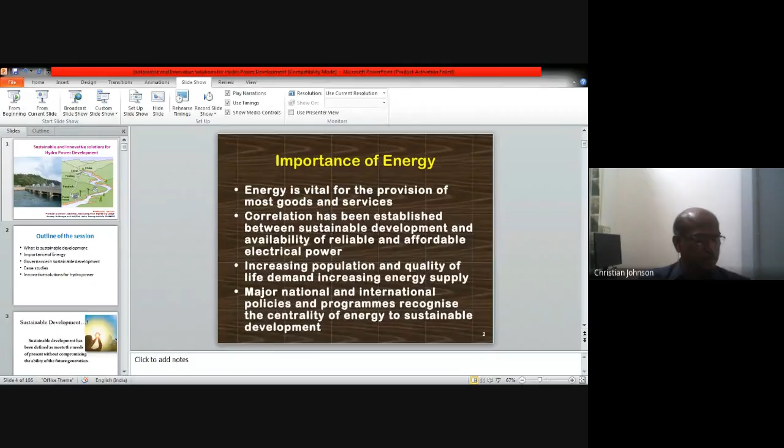Okay, this is the outline of the session. The points that I'm going to cover in this session are: what is sustainable development, importance of energy, governance in sustainable development, case studies, and innovative solutions for hydropower.

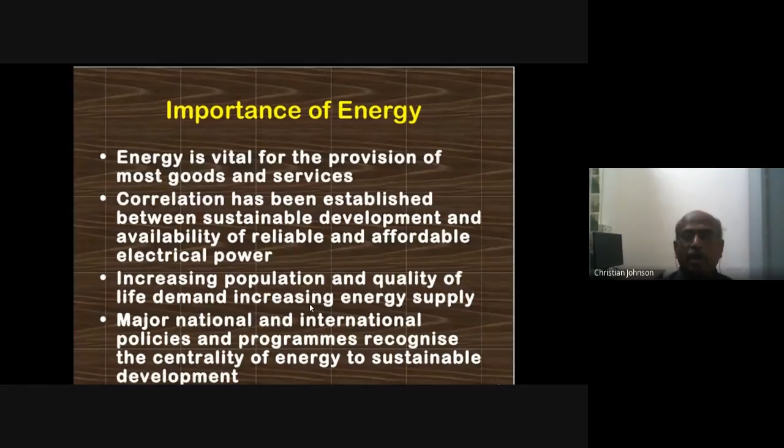Sustainable development means it meets the needs of the present without compromising the ability of future generations. You all know energy is very important. There is always a correlation established between sustainable development and availability of reliable and affordable electrical power. So increasing population in our country and quality of life demand always increases energy supply.

The conventional methods of energy supply have resulted in devastating environmental problems. You know that all the thermal power plants are emitting a lot of greenhouse gases leading to global warming, apart from environmental pollutions. So increasing demand for environment-friendly and renewable energy systems is the need of the day.

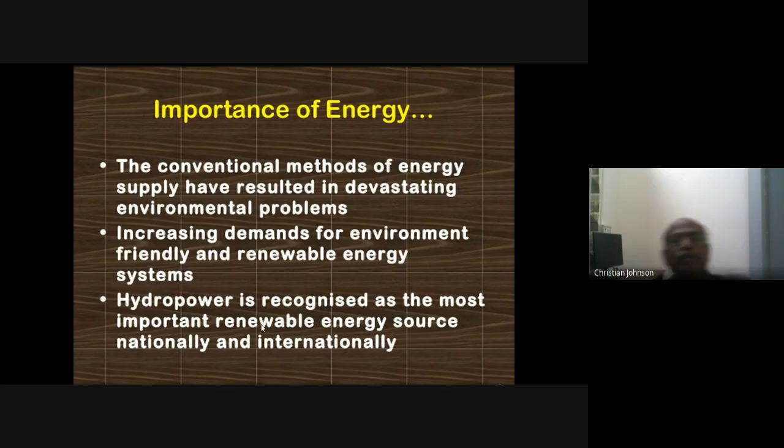So hydropower is recognized as the most important renewable energy source nationally and internationally. In order to keep this hydropower sustainable, proper governance, much prudence and discernment is needed.

As you all know, hydropower has been a leading source of renewable energy across the world, as I was telling in the last class, accounting for about 71% of the supply as of 2016. Most of the contribution is from North America and Europe between 1920 and 1970. During this 50-year period, thousands and thousands of dams have been built in those areas.

Even in our country, many dams have been constructed during those periods. The big dams stopped being built in developed nations because the best sites for dams were already developed, and environmental and social concerns made the cost unacceptable.

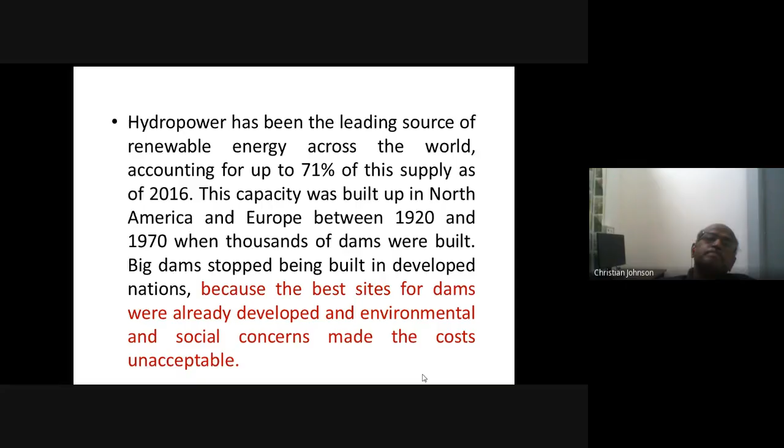So nowadays, more dams are being removed in North America and Europe than new dams are being built. The hydropower industry moved to building dams in the developing world since the 1970s, beginning to build large hydropower dams along the Mekong River basin in China, the Amazon River basin in Brazil, and the Congo River basin in Africa.

So in almost all these areas, the same problems have been repeated: disruption of river ecology, deforestation, affecting aquatic and terrestrial biodiversity, releasing substantial greenhouse gases. Thousands of people are displaced and people's livelihoods have been altered, in addition to affecting the food systems, water quality and agriculture near them.

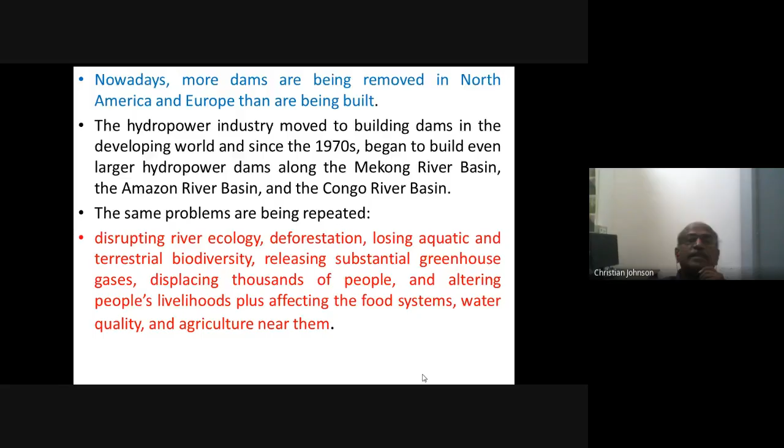So, under this scenario, we need innovative sustainable solutions to meet energy demands, guaranteeing food security and ensuring water availability around the globe.

So over the years, dams have been considered useful for land management and flood control. Considering these parameters, they also store water for irrigation and agriculture, provide recreation and navigation, and help address the management of aquatic resources.

Often large dams are promoted with the idea that locals will gain some benefits out of them. However, the evidence suggests otherwise. A recent study using a database of 220 dam-related conflicts found that in dams surrounded by controversies and conflict, the use of repression, criminalization, and violent targeting of activists and associations near the vicinity of the dams were common. So this is the result of a failure of the hydropower sector.

This demands good governance, keeping the sustainability issues in the hydropower sector in mind. Communities affected by dams frequently complain about the lack of consultation and attention to known negative impacts on society and environment, as well as the questionable promises made by the energy sector, stating that there is going to be cheaper energy bills, more jobs, and better infrastructure such as schools and hospitals.

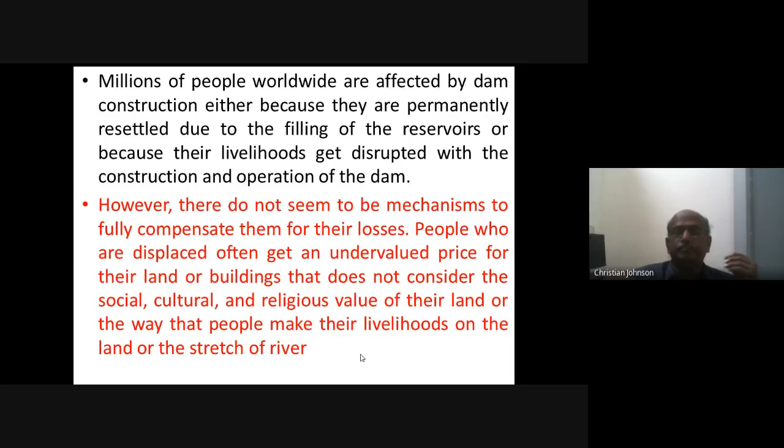In addition to that, it doesn't consider that after resettlement, people often lose their social networks and other types of social wealth, which has economic, cultural, social, and health consequences.

Communities that are not displaced, like those downstream, generally do not get any compensation, although the effects of the dam on their livelihoods are just as great as the effects on those with resettlement. This problem seems to be even more significant considering that most people affected by the dam are the poorest and more vulnerable in society, and they are often indigenous and traditional communities.

Monetary or non-monetary compensation mechanisms should consider that men and women are impacted differently by a dam, and ensure that the most vulnerable are compensated.

As one seeks to build a just and sustainable hydropower sector, it is important to build mechanisms that guarantee externalities will be internalized. In other words, those who benefit from hydropower far away need to compensate local populations where hydropower is produced, to offset the negative costs from energy production. They should also offset the heavy losses from transmitting power across great distances.

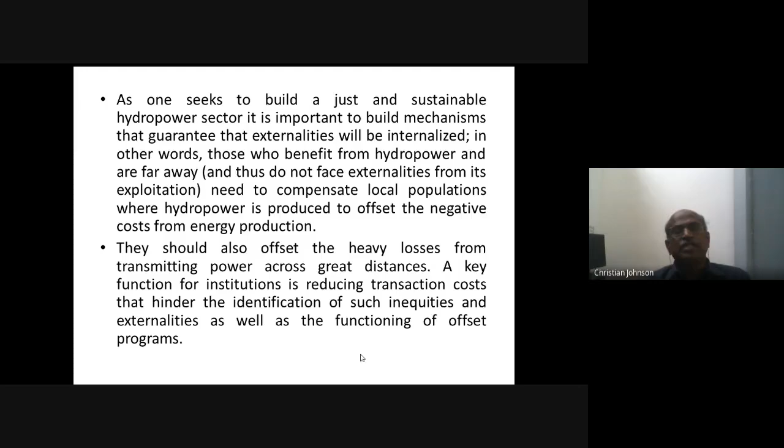A key function for institutions is reducing transaction costs that hinder the identification of such inequities and externalities, as well as the functioning of offset programs.

Sorry, somewhat these slides are having very deep points. However, I'm not going to go into more detail. But anyway, I will touch upon a few points. So when you go for the hydropower sector, there are so many socio-economic and political issues that need to be addressed.

Resettling people without concern for any of these issues will affect the public in a larger way. So whenever you go for hydropower, any nation has to keep these points - socio-economic and political issues - in mind. Only then can these sectors sustain.

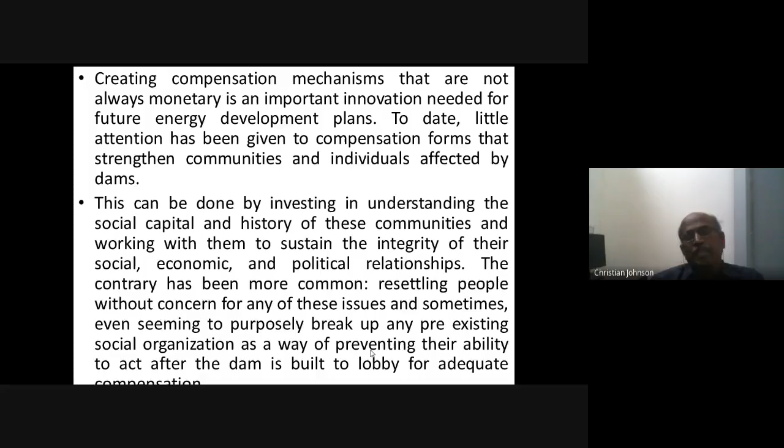As I was telling, some of the dams that got old in countries like America and Brazil are being demolished, instead of repairing and retaining them. I would touch upon some of the other case studies also.

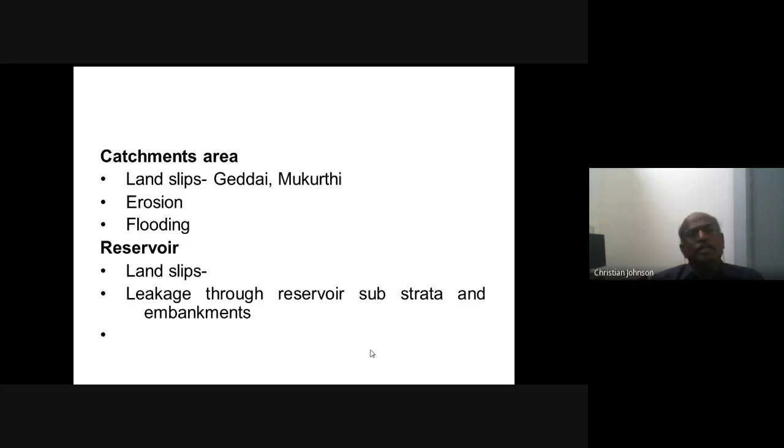From the local example in India - there are so many power houses in the Western Ghats connecting Tamil Nadu, Karnataka, and Kerala. In the southern part of the Western Ghats, there are so many hydropower stations existing. Almost all the power stations available in Tamil Nadu have been installed in those areas.

So in those areas, there are some issues like landslips, and landslips always result in accumulation of silt in the reservoirs. This causes a lot of erosion problems, and in addition to that, there are flooding issues also.

Whenever this landslip occurs, one has to be very cautious in order to avoid the flow of silt - large quantities of silt along with the canals or rivers into the reservoirs. Suppose if it is not done so, that will lead to a lot of silting and sedimentation in the reservoirs.

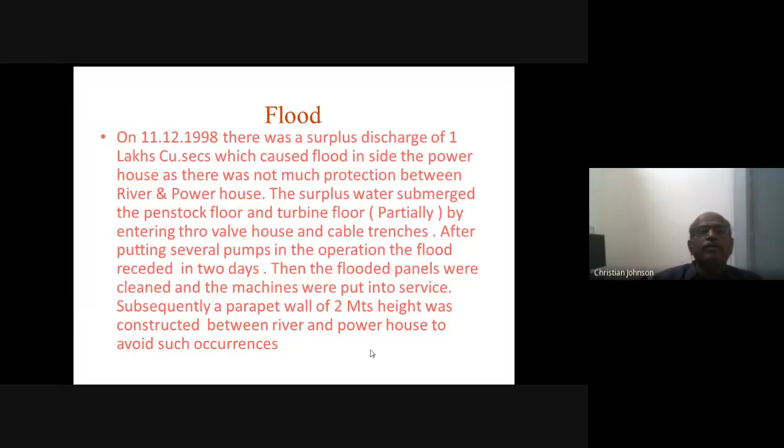So they have gone for putting some kind of parapet wall. These are all issues - when there is a flood, it inundates the nearby area. There was a nearby park affected by the flooding water, so people rose up and stood against this hydropower, even though it is cheap and reliable, because of these issues people object.

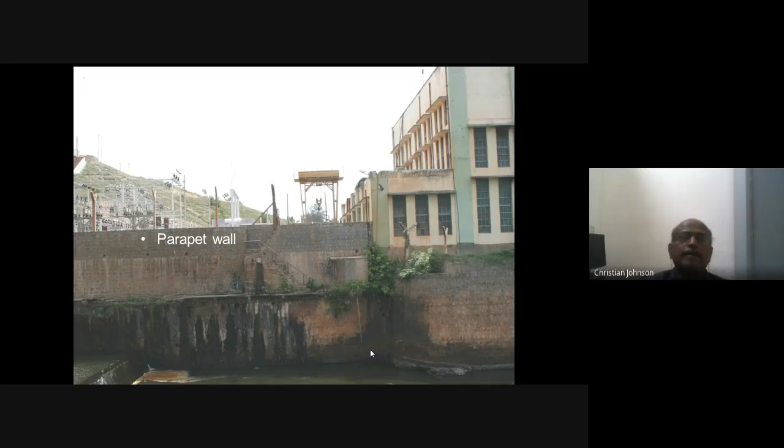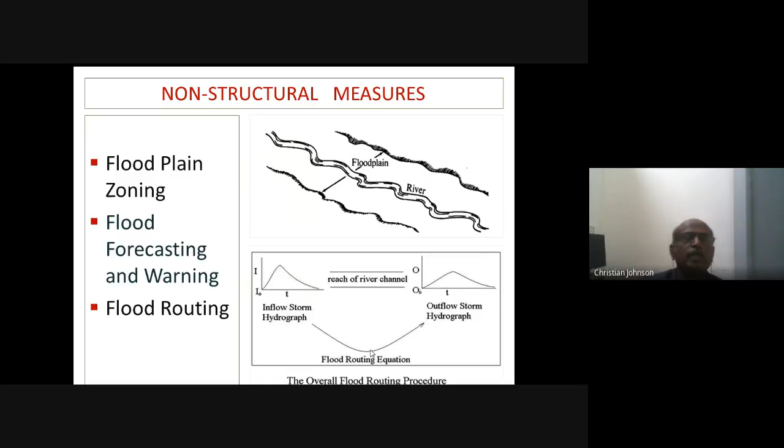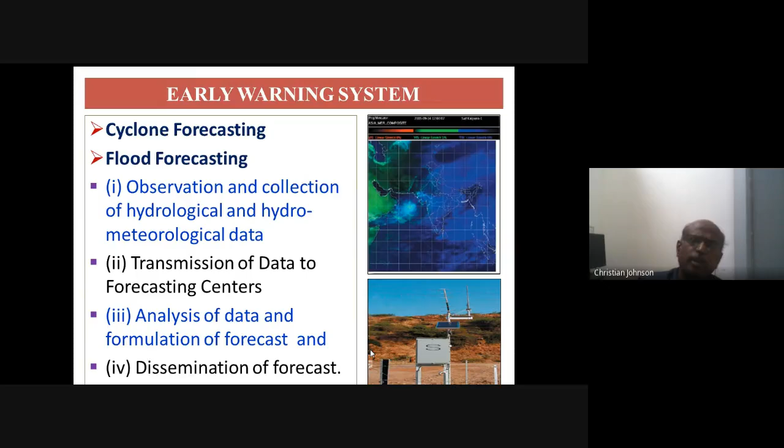So there need to be proper flood forecasting, warning systems, proper flood routing, and proper floodplain zoning in the catchment areas. Cyclone forecasting, flood forecasting, all these things need to be concentrated, so a lot of studies are going on. Many people have gone for integrating these early warning systems in the hydropower station areas also.

As I was earlier telling, reservoir sedimentation is another issue. In one of the dams in Tamil Nadu called Pillur, around 75% of the reservoir is filled up with silt, and the removal of the silt is a big issue. It's still a chronic one. So around 75% of the reservoir capacity is filled with silt, and only 25% is available for the water. The removal of silt is a big issue.

The forest department is not allowing our sector people to remove the debris or silt from the reservoir and deposit them in the nearby forest area. So some innovations have to be done in order to remove the silt from the reservoir. Civil engineers or researchers can really think of this: how can these sediments be converted into a useful construction material, or used to enhance agricultural production?

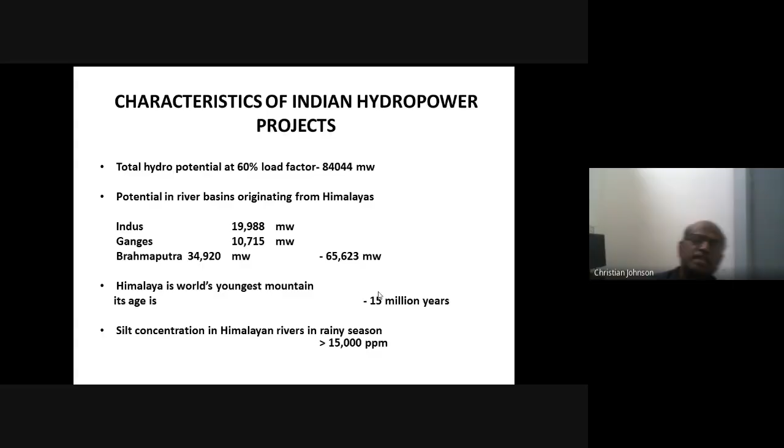But the Himalaya is the world's youngest mountain in age. Though they say 15 million years, when compared to all other mountains, Himalaya is a recent one, and full of sedimentary type of rocks. So whenever there is rain, and right now with all the ice melting issues and avalanches, a lot of silting problems are happening. When you compare those rivers in the Indus Basin, Ganges Basin and Brahmaputra Basin with rivers flowing in central India and southern India, the silt particles there are very peculiar - they are always in a suspended form. They say that silt concentration in Himalayan rivers is more than 15,000 parts per million.

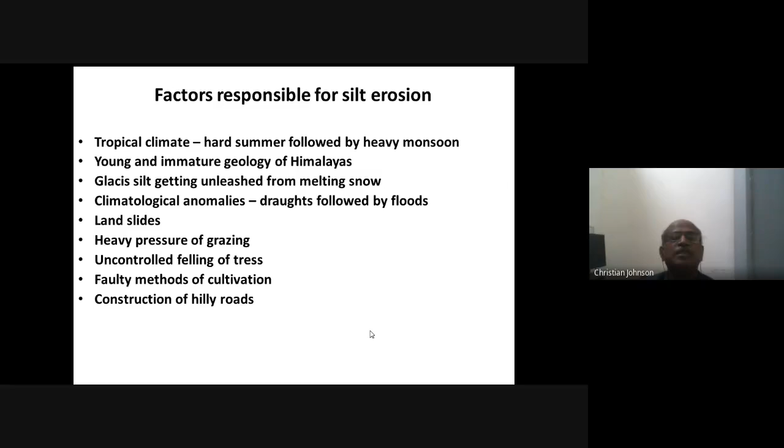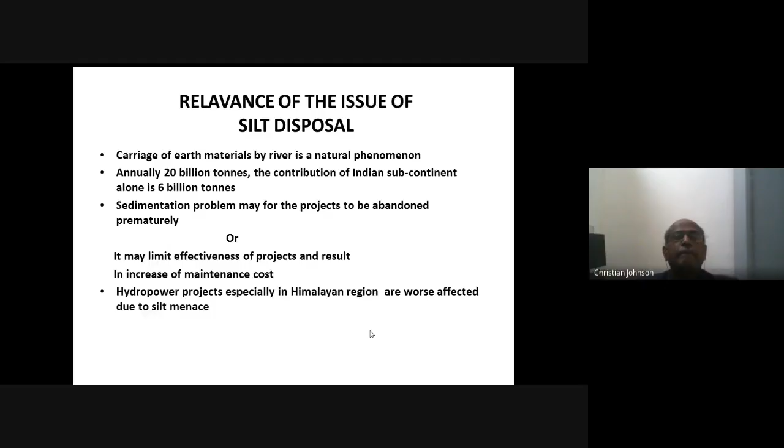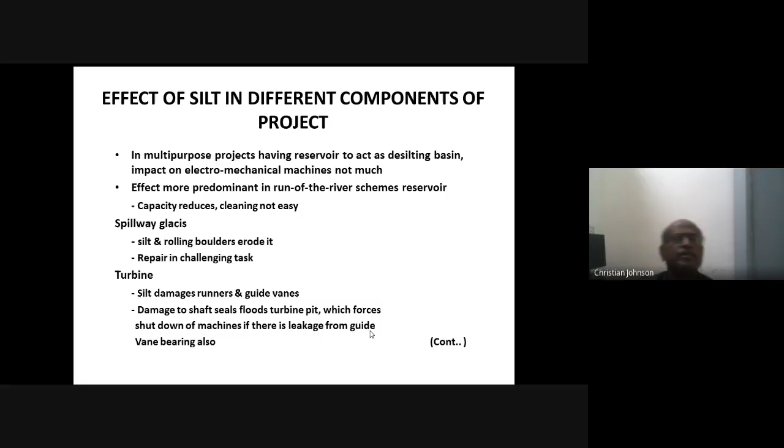Uncontrollable felling of trees, methods of cultivation, construction of hilly roads, all these things are the reasons for silt erosion. Because of this silt, the turbine blades are very much affected. In addition to the reduction of reservoir capacity, the suspended silt in the water considerably causes damage to the turbine runners, the guide vanes, and also affects the sealing systems a lot.

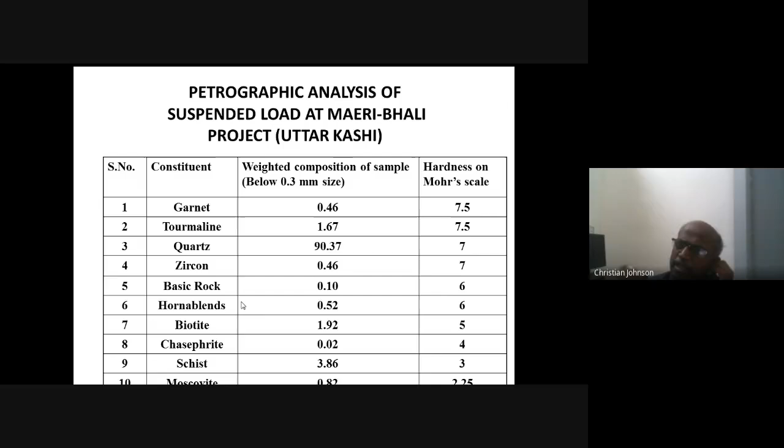So this is one of the challenges - this silt issue is an important challenge. These are some of the chemical constituents which are available in the silt, which makes the silt very hard. It is able to just hit the turbine blade and form some pitting holes. Such is the hardness of the particles present in the silt. The hardness of quartz on the Mohs scale is 7, and quartz-containing silt can be as high as 90%. So silt predominantly containing quartz causes damage to the turbine, especially when associated with high velocity flow.

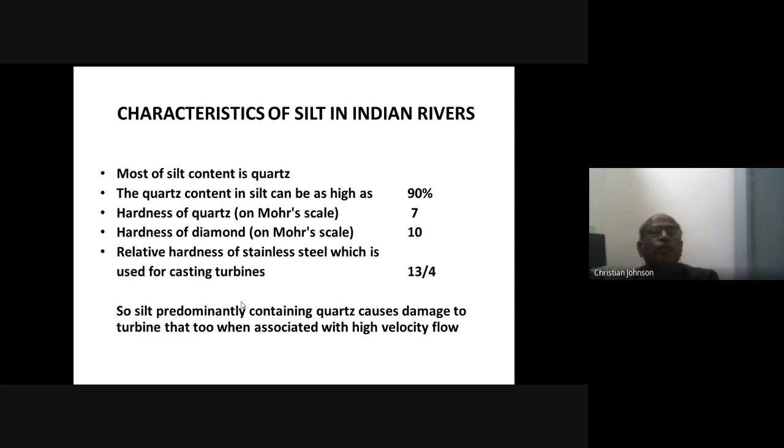Innovative solutions against sedimentation are the need of the hour in order to sustain existing hydropower. So there is a three-pronged approach to manage the silt: one is catchment area treatment, the second is desilting arrangement, and then the design of silt-resistant underwater parts, especially electromechanical equipment like turbines and other parts.

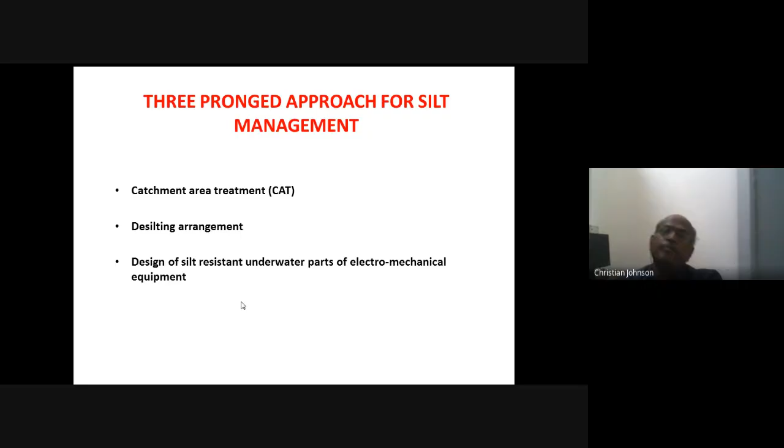If you take the catchment area treatment, there are biological measures and engineering measures. Turfing, plantation, pasture development come under biological measures, which reduce silt erosion. Check dams, contour bunding, wire crating, rock benching, geotextiling, and networking of drainage wells over the slope of the mountains are encouraged in order to reduce silt erosion. A lot of innovations are going on in this front.

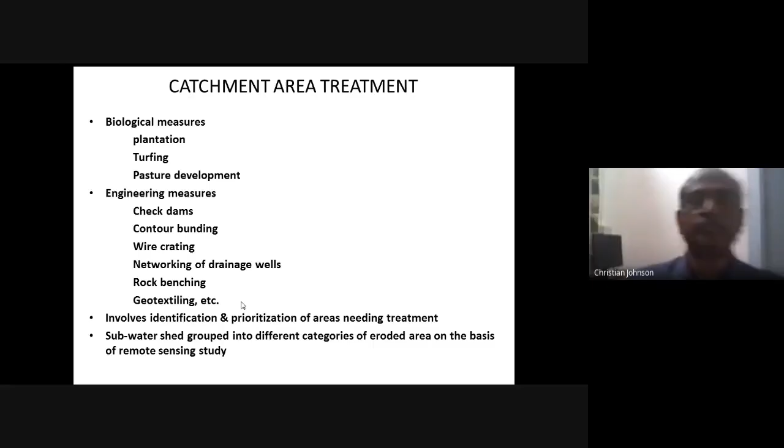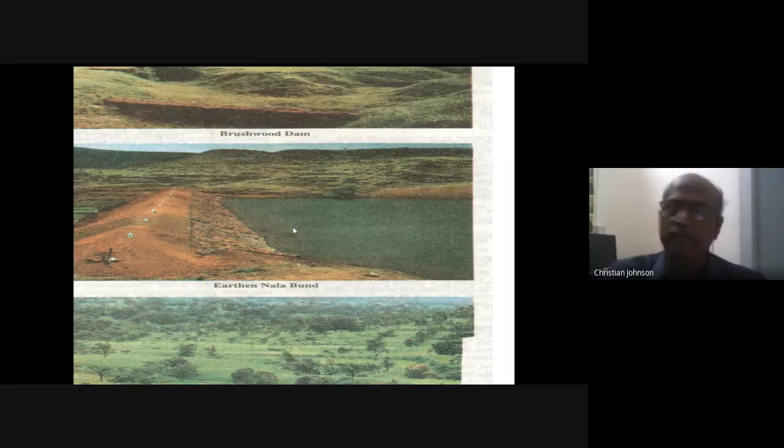So this is one of the simple check dams constructed across the river in order to contain the silt flowing into the main forebay. Catchment area treatment was given way back by the National Hydroelectric Power Corporation. So much money has been spent in order to improve the catchment area, to reduce the silting.

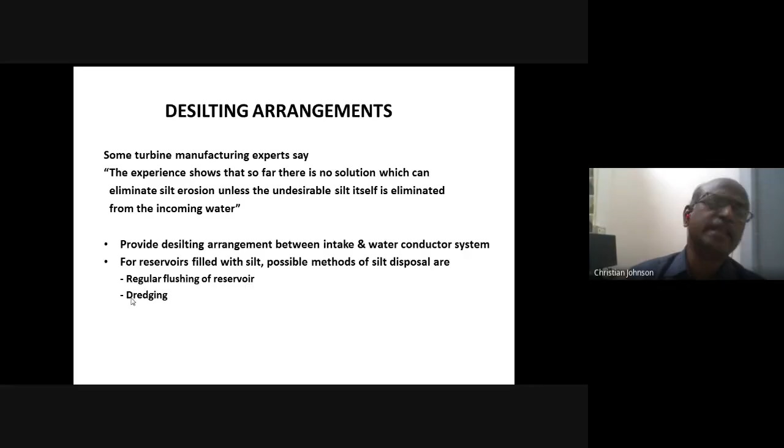Some turbine manufacturers say experience shows that so far there is no solution which can eliminate silt erosion unless the undesirable silt itself is eliminated from the incoming water. So now there are some silt extruder methods, desilting chambers. These have been promoted, like regular flushing of reservoirs. All these are some of the innovations. Dredging is a very costly one, this underwater excavation is a very costly one.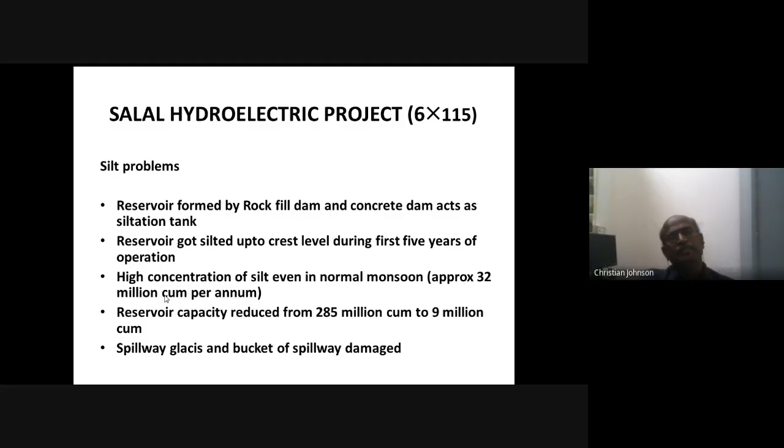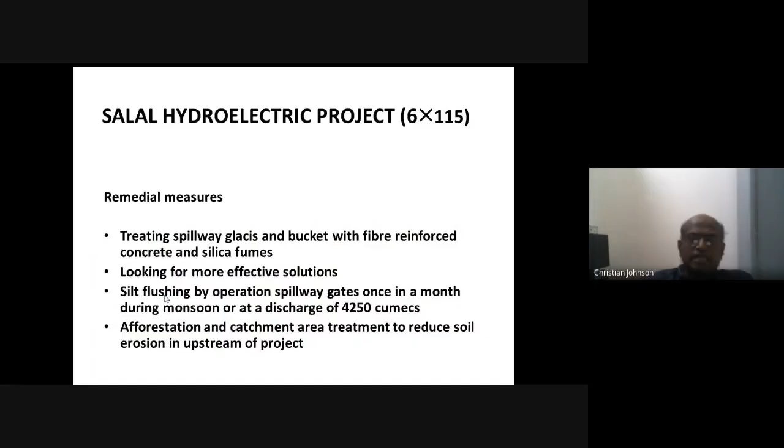There is another case study, Salal hydroelectric project in northern India, which was very much affected because of reservoir silting. So they have gone for silt flushing through the spillway and afforestation and catchment area treatment to reduce soil erosion in the upstream of the project. Because of the suspended silt, which is very hard, when it goes in it strikes the turbine and causes cracks.

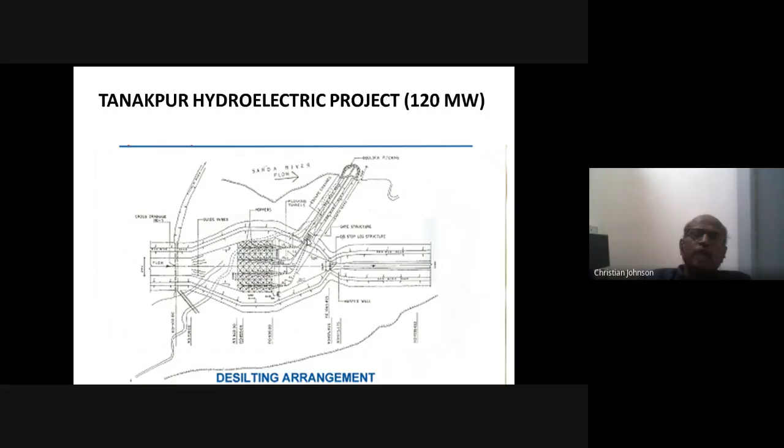This is one such desilting chamber arrangement. This is the main course of water where it is going, and there will be a conical shape. Below that, water will be just circulating, and the heavy particles will go down and go out in this direction, by use of flushing.

Likewise, there are silt problems in Tanakpur hydroelectric project in northern India, and Chamera hydroelectric project in northern India, and Uri hydroelectric project in Uttarakhand, and desilting arrangements have already been introduced as an innovation.

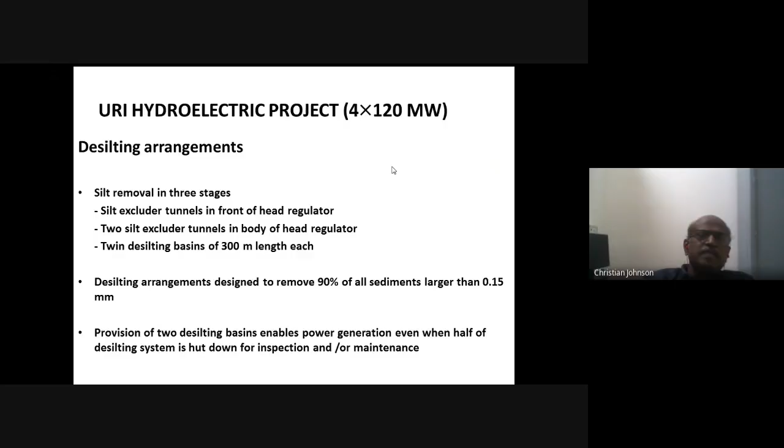So the next issue, apart from desilting issues in the reservoir, is dam safety issues. So what is a dam? Water is a vital resource to support all forms of life on earth. Through the history of the world, dams and reservoirs have been successfully used in collecting, storing and managing water needed to sustain civilization.

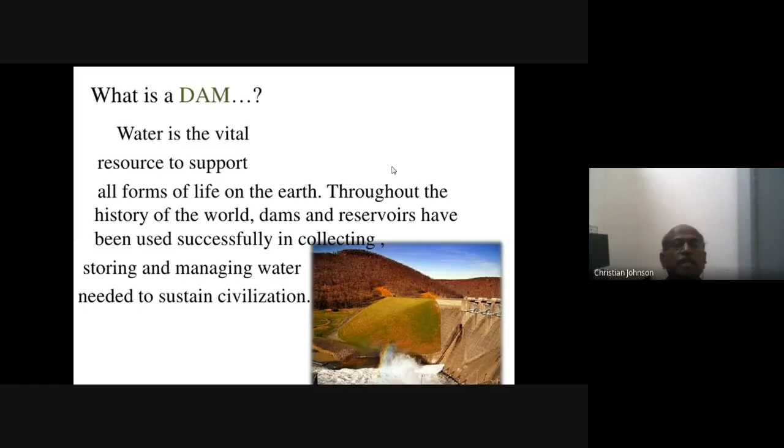Across the world, as I was telling in the beginning, thousands and thousands of dams which have been constructed earlier are nowadays being demolished. So is a dam harmful to the human environment? While a dam provides benefits for society, the impacts on the surrounding also need to be addressed prudently.

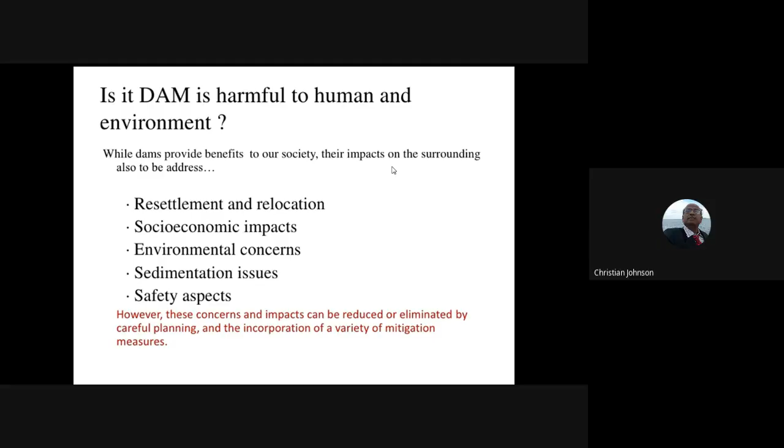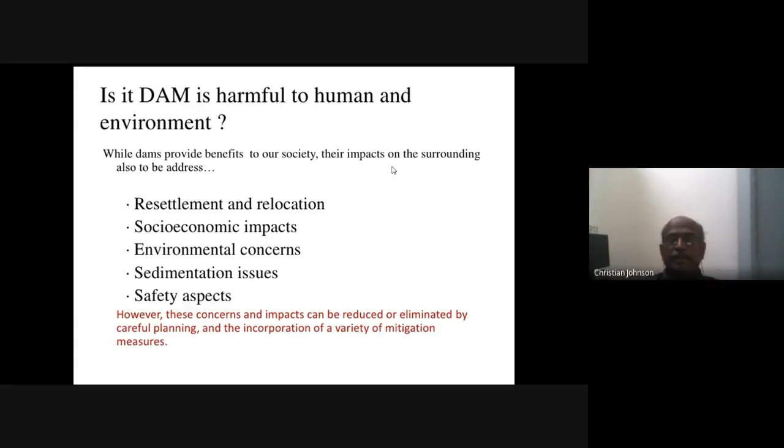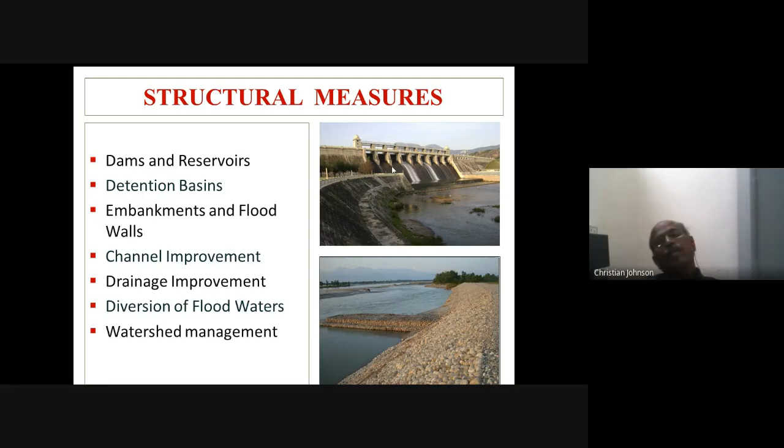I will just concentrate on some of the significant issues. There are three interconnected specific issues that have had particular significance in dam projects, which need to be dealt with differently in future development. They are: resettlement of displaced people and related socio-economic issues, changes to existing fisheries and local resource uses, and the effects on ecosystems.

To ensure the continued and dependable delivery of benefits from a dam, the owner must have a comprehensive plan for operation, maintenance, and rehabilitation. As dams become older, safe performance becomes a concern. This requires more attention in the form of inspections, evaluations, and modifications, including upgradation.

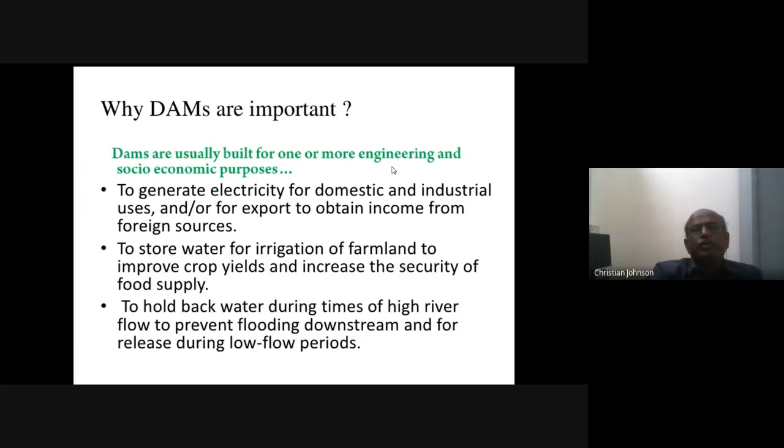Dams are more important when they are usually built for one or more engineering and socio-economic purposes, such as the expansion of social services and improved infrastructure in the region served by the dam - for example, schools, hospitals, roads, fishing, and recreational potential of reservoirs. All these things need to be addressed.

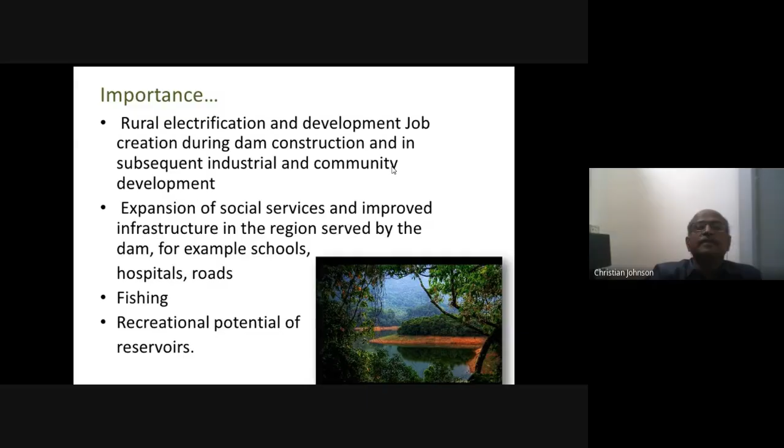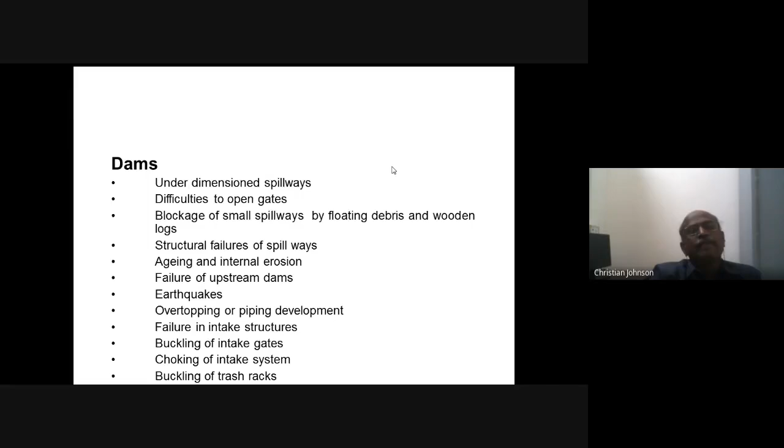Some of the provisions in newly built hydroelectric projects, recently. With this background, I would like to mention some of the key issues in the existing hydropower sectors, in the dams. So if the dams are not properly functioning, as in the case of the US or Europe, they need to be demolished.

So proper monitoring systems in the existing hydropower has to be extended and strengthened. There are cases nowadays where the flood happens and you cannot foresee it. The meteorological department can predict that storms may happen, but the quantity of rain that takes place, you cannot quantify or forecast. So the existing dams have a certain capacity to evacuate or release the excess flood water coming to a reservoir, and there is a proper design of spillway for that.

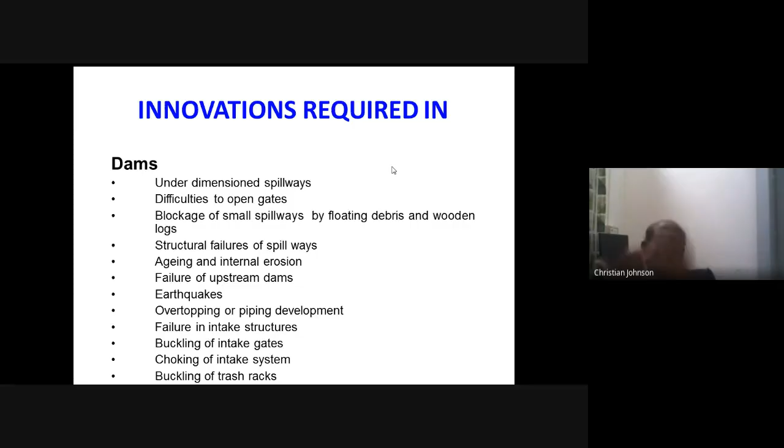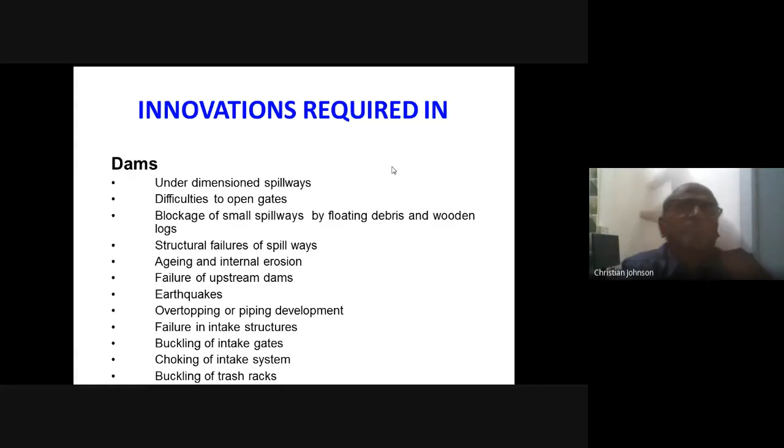So there is a terminology called PMF, probable maximum flooding. A probability study is taken up when unprecedented rain has occurred during the past 1,000 years. This data is collected, and the flood is considered for designing the spillways.

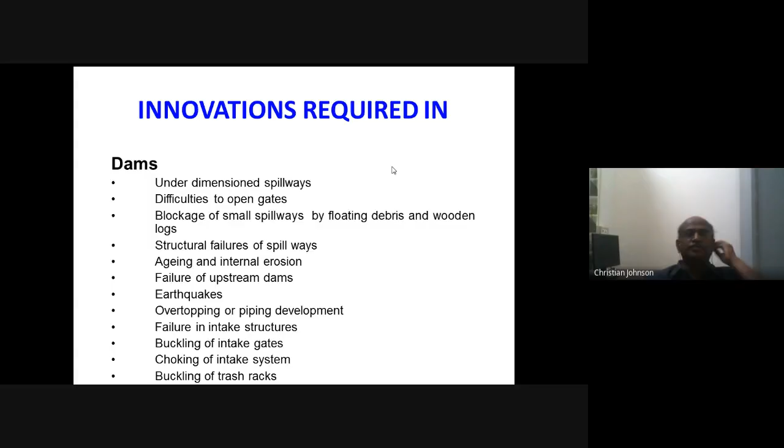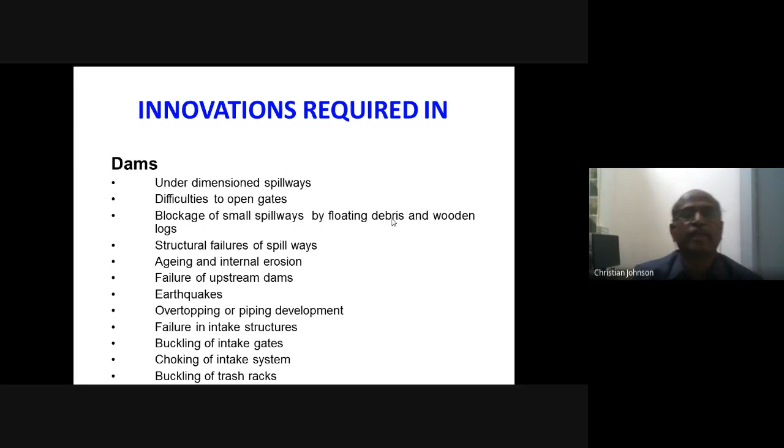So there are other issues like earthquakes, buckling - I already touched upon these. All these things now require innovations.

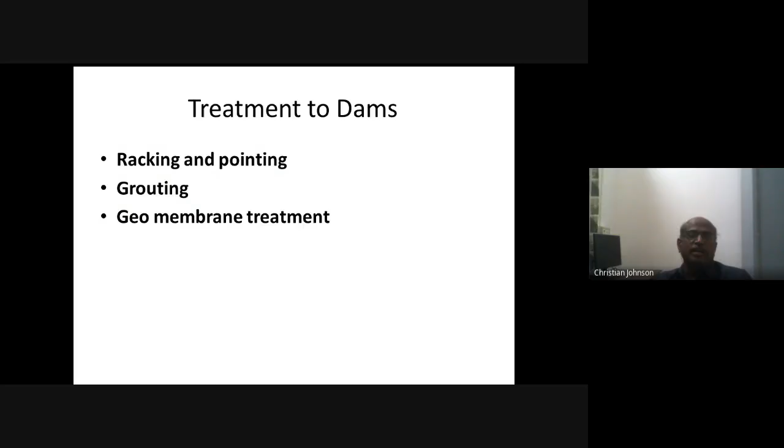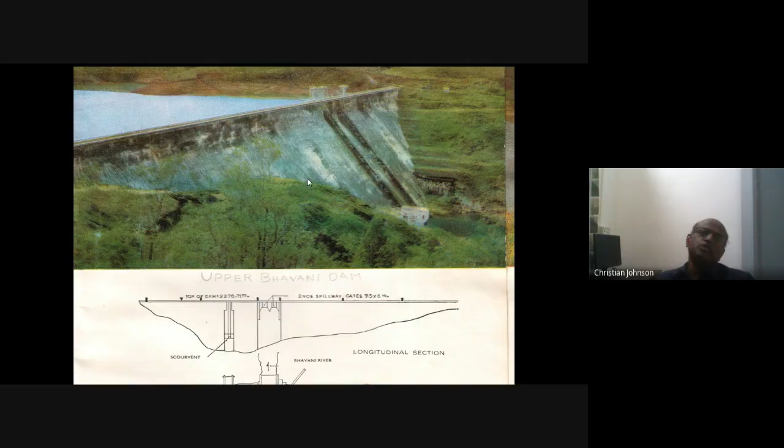Let's see the dam. In order to address this issue, grouting is done. Grouting is just injection of cement slurry into the dam so as to compensate. So this is another innovation - there are so many new concepts being addressed.

So this is another important thing. Yesterday a professor was asking this question about leakage. This dam - I don't want to name it - was in South India, in Tamil Nadu. It experienced around 30,000 liters per minute of leakage. Then they tried their level best to stop that, so they stopped this power station for about 6 months.

And in the upstream face, they put this kind of geomembrane treatment. Also they installed some instrumentation, like fiber optic cable mechanisms to sense water leakage based on moisture content, and this will give an alarm showing at what point the water is leaking. So this kind of innovation has been done in Tamil Nadu.

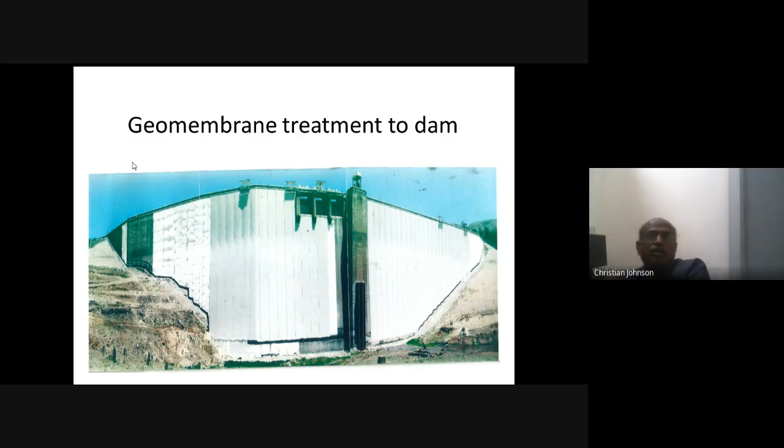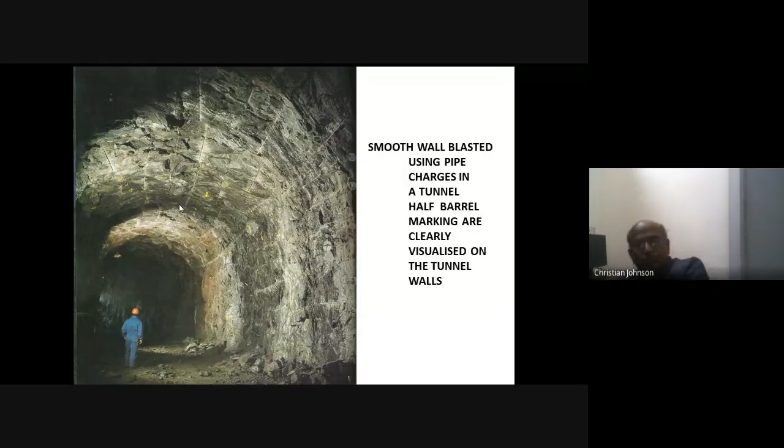And also in the tunnels, rock fall can often happen. So this has to be properly monitored periodically and strengthened.

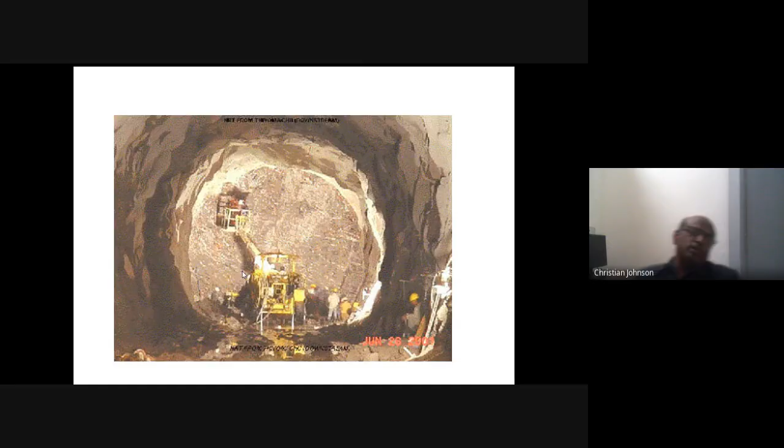So this is an innovation mechanism involving tunnel boring machines. The cost of the machine is around 30 crores. Very few corporations, like HCC - Hindustan Construction Company - have this kind of machines to make the tunnel. So the alignment and all these things are other issues as far as tunnel alignment is concerned in the Hyderabad sector.

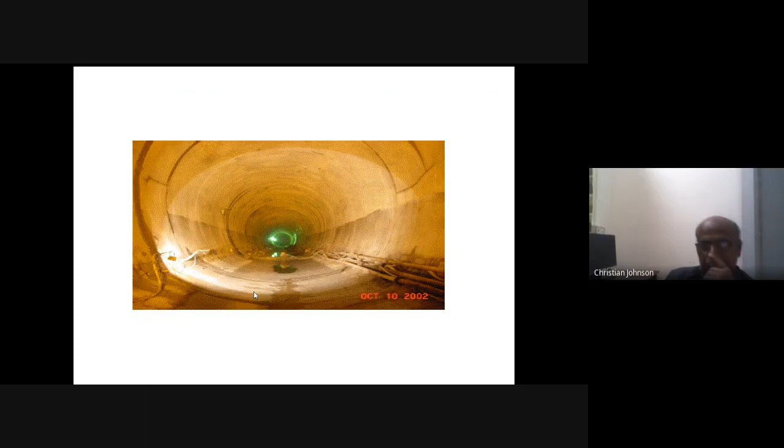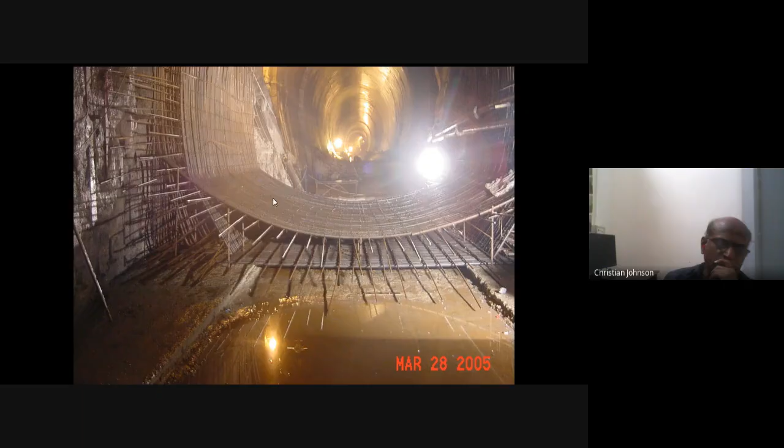So this is the DRESS technology in order to prevent rock fall and strengthen the rock mass. Here's a beautiful inner view of the tunnel when it is empty - it is meant for flowing water, taking water from the reservoir to the turbine. And this is the inner detail of how the reinforcements are laid, how the steel plates are fixed. So it's somewhat like civil and mechanical engineering combined, and all these works are carried out together.

But one part you have to lay the concrete; the other area, mechanical engineers will be busy laying the steel plates, welding, and so on. So there is a terminology called DRESS technique, which is meant for drainage, reinforcement, excavation, and support solutions.

So this is a key word in the tunnel: drainage advance of rock mass ahead of the face with long drainage holes. You have to make a lot of drainage holes in the tunnel in order to remove the water flowing into it. Then there's the reinforcement of rock mass by installation of long rock bolts of 12 to 15 meter length, and grouting. Then you have the excavation and support solutions.

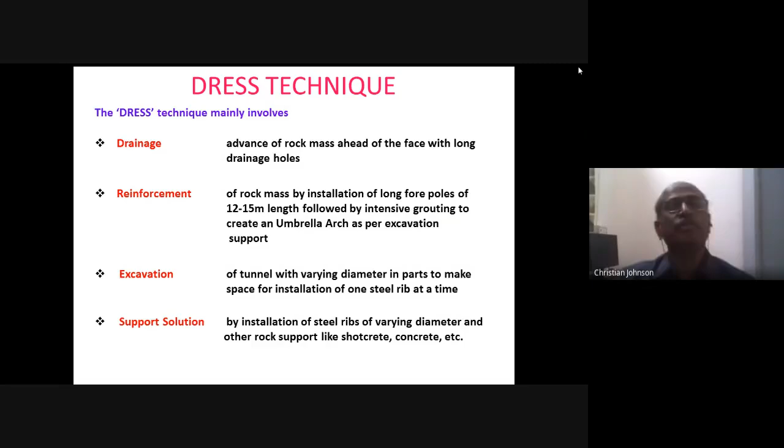So now the time is okay.

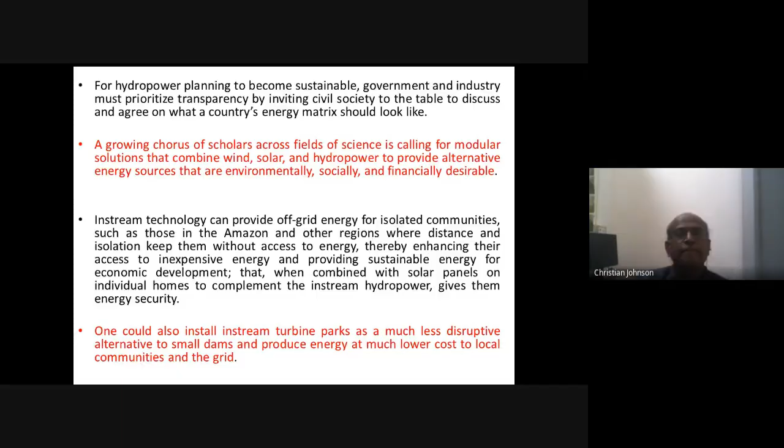Hello. Hello, hello, sir. Query session will be allowed at the last. Yeah, okay, yes sir.

So the impacts of hydropower, already I was telling that climate change due to CO2 emission is one of the major environmental challenges today. Renewable energies are the solutions to climate change.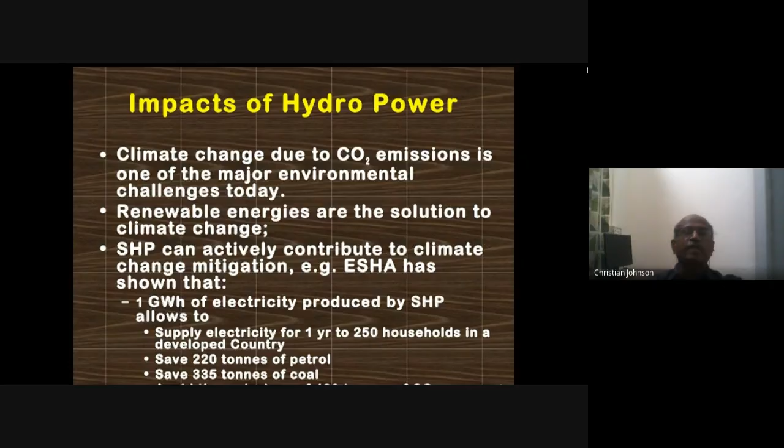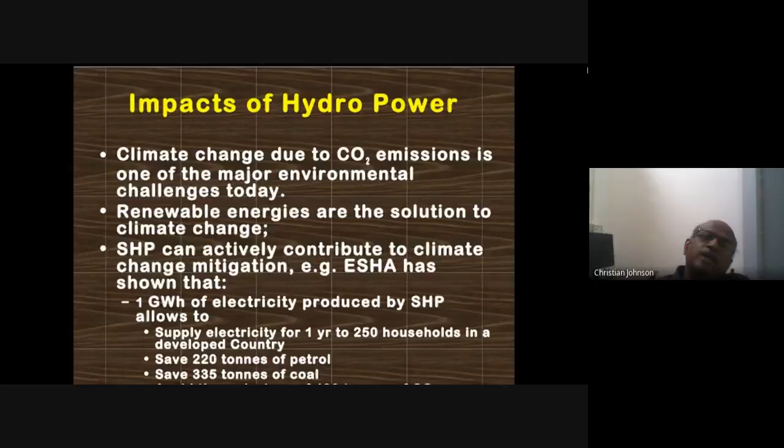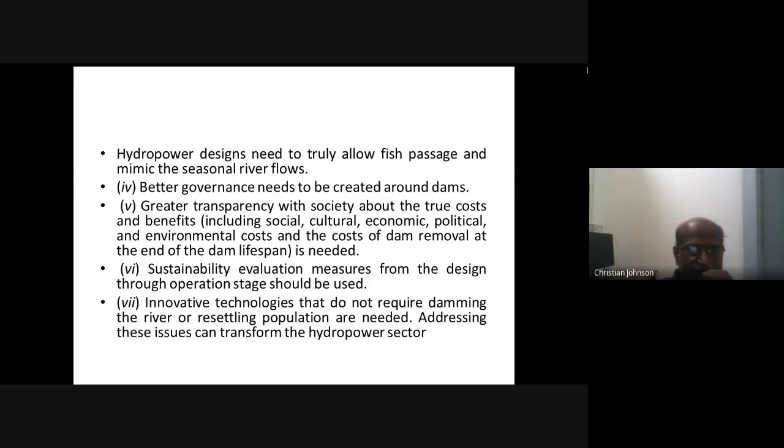Small hydropower contributes to climate change mitigation because it is an inexhaustible energy source. It does not produce greenhouse gas emissions. So, in order to overcome all these issues, proper environmental impact assessment has to be made, social impact assessment has to be made, and decide better governance and sustainable solutions, incorporating innovative technologies are the need of the hour.

So, in order to overcome these dam issues, silting issues, majorly in the US and other countries, European countries, small hydropower has been encouraged, even in China, because small hydropower stations don't require large dams. You require only an instream turbine. In stream, the stream itself, you just suspend and hold the turbine without permanently fixing or housing them.

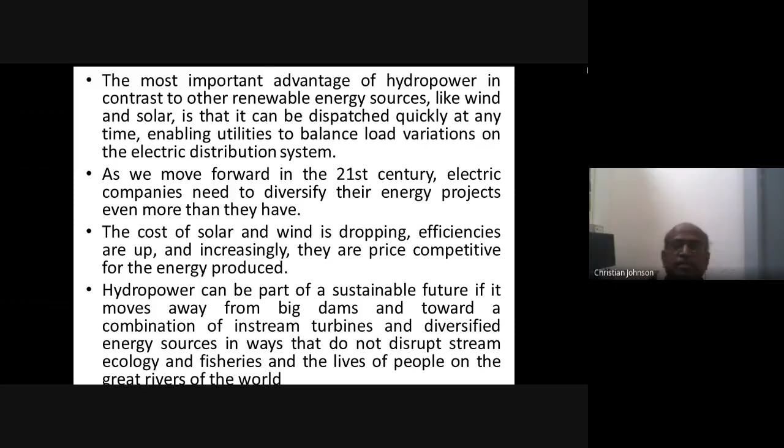If you categorize the hydropower schemes, the hydropower stations, already I have explained, are classified as large, medium, intermediate, and small. In our country, in India, the style is that power installed capacity from 1 to 10 megawatt is classified as small hydropower, mini power stations, and micro power stations.

So you have to understand that the power stations which are large, medium, and intermediate require huge construction of dams. Once you construct a dam, you create a lot of big reservoirs. There are rehabilitation issues. But in the case of small hydropower, such issues are not there. They are minimal.

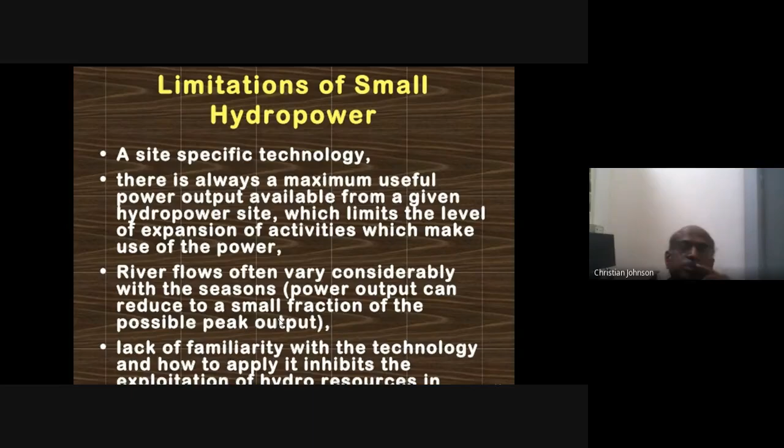So it is a site-specific technology. There is always a maximum useful power output available from a given hydropower site. River flows vary considerably with the seasons, and power output can reduce to a small fraction of the possible peak output.

So yesterday I was telling about run-of-river schemes. In run-of-river schemes, the water is just diverted, that's all. There is no permanent pondage. Maybe there may be small weirs or barrage gates, but there won't be permanent pondage. Water is just diverted, so there is no issue of resettlement or rehabilitation here.

So it's a simple one. It can be built locally at low cost. Communities can operate and maintain it. In Ooty, in Tamil Nadu, the municipality has gone further. There are a lot of tea estates there, and the tea estate owners have installed small hydro wheels, turbines across the streams there. They tap hydropower from those sources, as it was in the beginning.

In the beginning, when hydropower came to India, British people, when they came to India, settled in parts of West Bengal and parts of South India, the Nilgiris. That's how it started. Here in South India, especially in Nilgiris, they got settled there. They provided big water wheels across the river canals to tap electricity for their tea factories. This is how it started.

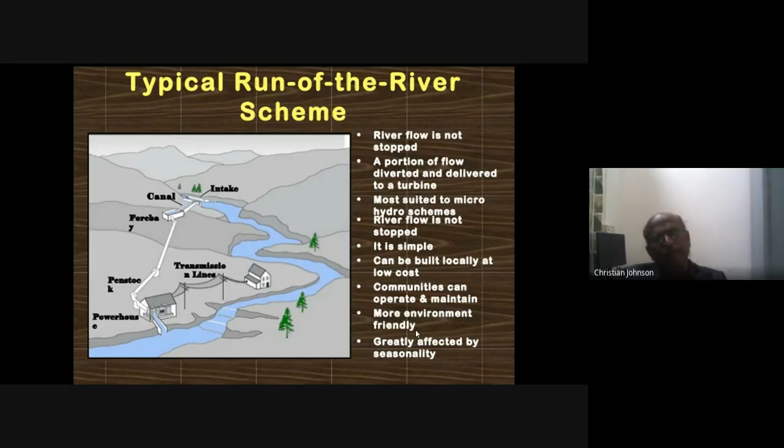So the civil engineers who are involved in this area need to come up with innovations, as many as they could.

Various countries have defined small hydropower differently. Take China: they call it micro hydropower if less than 100 kilowatt, mini between 101 to 500, and small 501 to 50,000 kilowatt. In the US, if it is less than 500 kilowatt, it is called micro hydel; 501 to 2000 is mini; less than 15,000 is called small.

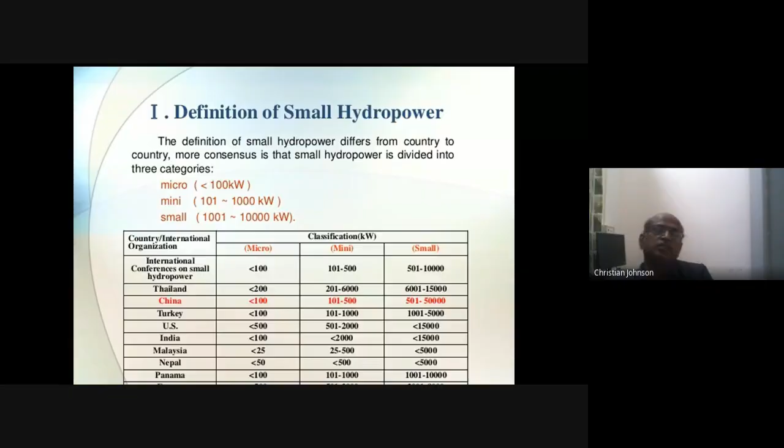In our country, if it is less than 100 kilowatt, it is called micro. Between that range it is called mini, and from 2000 to 15,000 kilowatt it is called small. Similarly in other countries, the classifications vary.

So the present globalized and consumerized world needs sustainable development mechanisms for a better tomorrow. Without sustainable development, we cannot stand here; we cannot live in this world. So every part of life needs sustainability. In the energy area, sustainability can be best drawn if small hydropower stations are encouraged. These small hydropower projects can make a big difference in many lives.

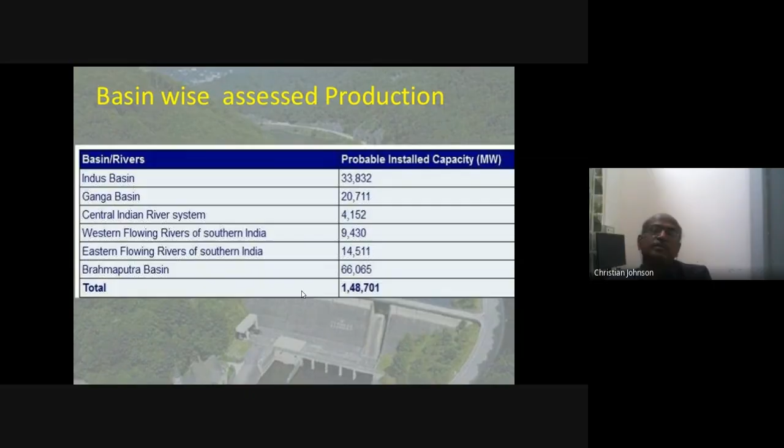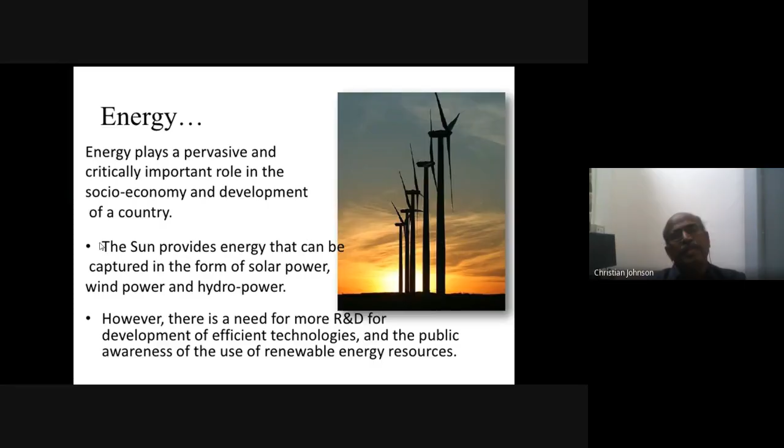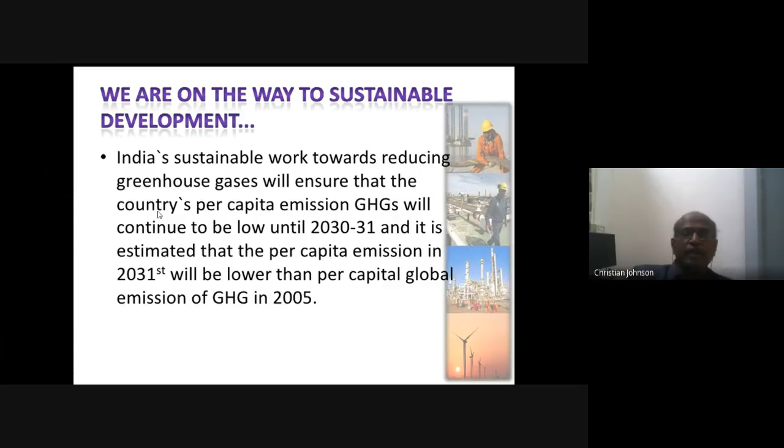So, with this background, how can sustainability be encouraged? In addition to hydropower, we have biofuels, wind power, oil, nuclear power, and solar energy. All these things can be combined, and we are on the way to sustainable development. India's sustained work towards reducing greenhouse gases will ensure that the country's per capita emission will continue to be low until 2030-31, and it is estimated that per capita emission in 2031 will be lower than the global per capita emission. This is as per one of the magazines.

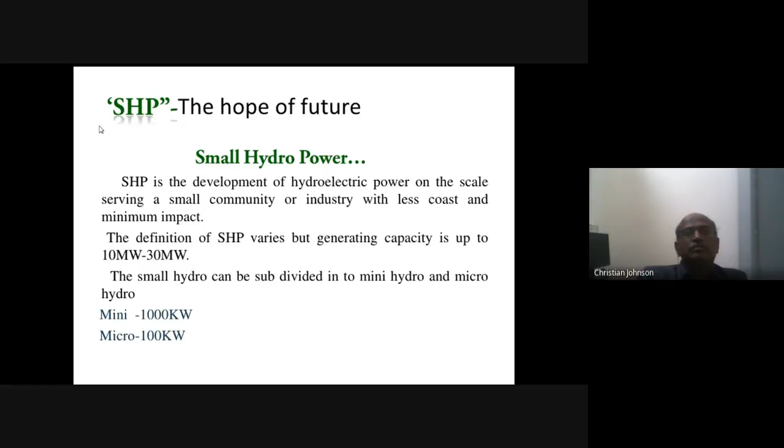So the hope for the future is small hydropower. These are some of the benefits of hydropower: it's clean, it doesn't produce greenhouse gases, it leaves no waste, and it uses no fossil fuel. Water is not destroyed during the production of electricity can be used for other purposes.

So, I would like to just recap. Though hydropower has got a lot of benefits, if issues like reservoir-induced seismicity, that is reservoir-induced earthquakes, sedimentation issues, leaking issues, resettlement issues, and relocation issues are not addressed properly, hydropower is at stake. So researchers, engineers, students, this whole fraternity must come forward to study the social and economic issues related to this, as well as environmental and ecological issues, in a deeper way.

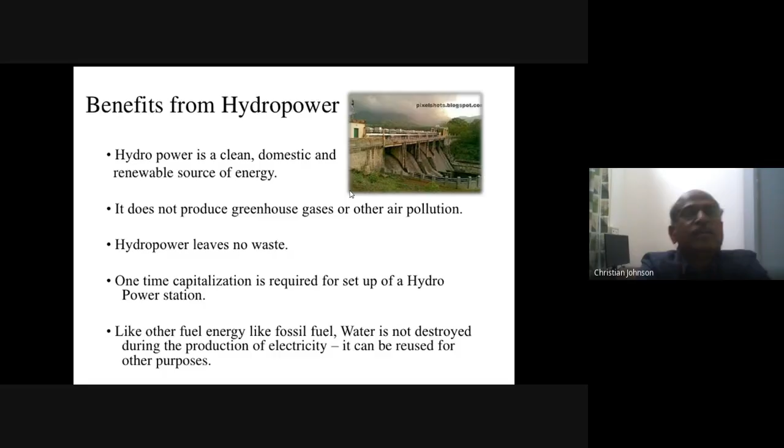So with these points, I just conclude my session. Let us get ready for virtually any emergency situation. Why I am saying this: in Kerala, there is a power house called Idukki. The dam is called an arch dam. At this power house, some 5 years back, I suppose, there was a great bursting that took place, just before the completion of construction. That's an emergency. In some stations, flooding occurs.

In one of the first stations in Tamil Nadu, constructed in 1932, there was a flooding of the total power house. Even a power station in Pallivasal power station got flooded. There are several other issues, like in Jammu and Kashmir, and in Kedarnath - a few years before, there was heavy flooding, and the whole power station got inundated. Some of the slope strengthening measures like revetments and gabion structures all got washed away. So we have to get ready for virtually any emergency situation.